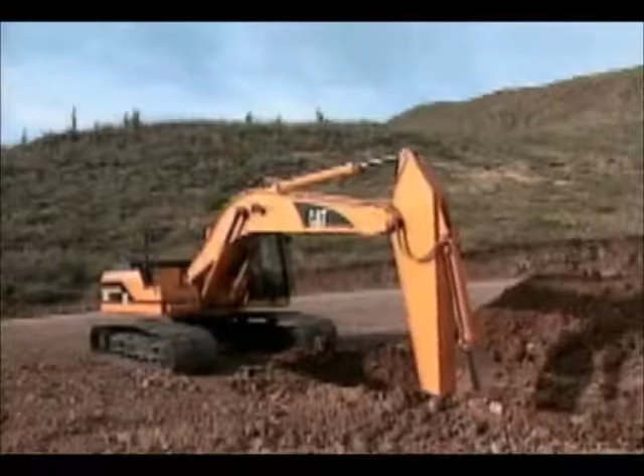This is just a small segment of the hundreds of feet of hydraulic hose on this excavator. In addition to carrying hydraulic fluid, this hose is also storing and carrying contaminants.

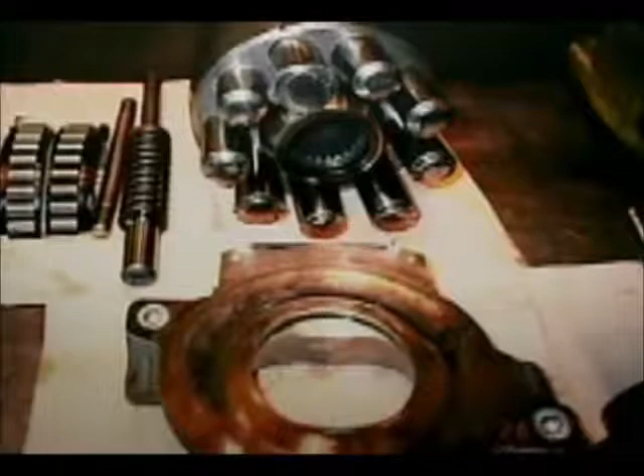This is a piston pump. It is no longer pumping hydraulic fluid. It failed because of too much contamination. This excavator now sits idle and unproductive since an excessive level of contaminants entered the system and went unaddressed.

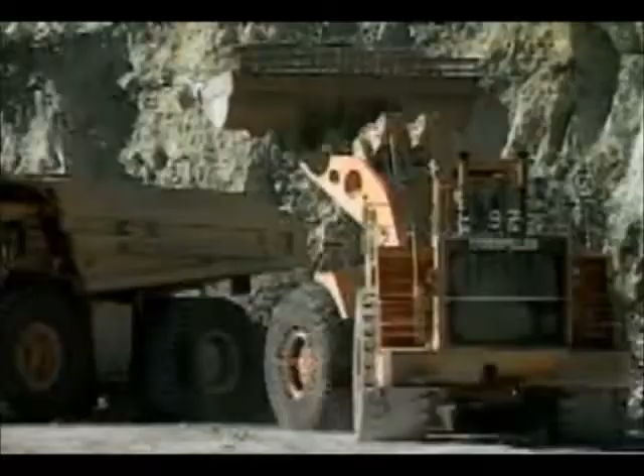Even before a breakdown, contaminants in fluid can reduce system efficiency. This is as true for fuel and engine oil as it is for hydraulic oil. A less efficient system is a less productive system.

These productivity losses can go undetected because efficiency loss is gradual. In hydraulic systems, for example, efficiency can drop as much as 20% before the operator detects a change in operation. That's losing a day of productivity each week.

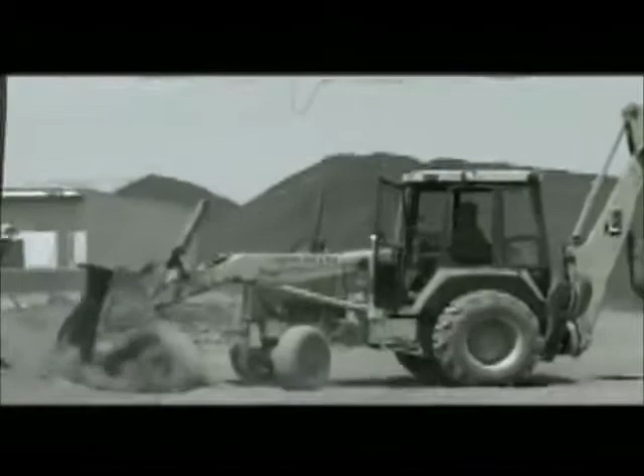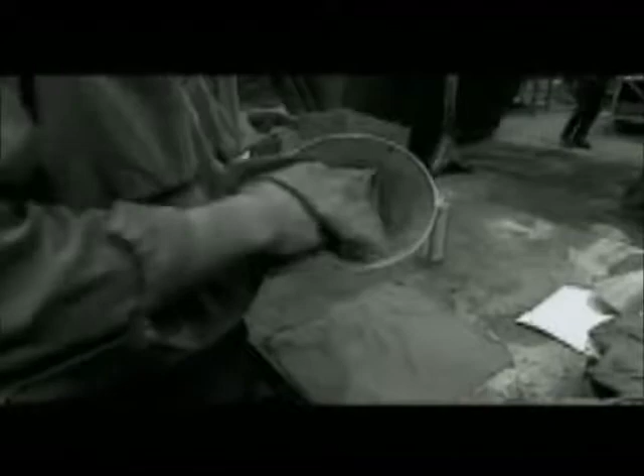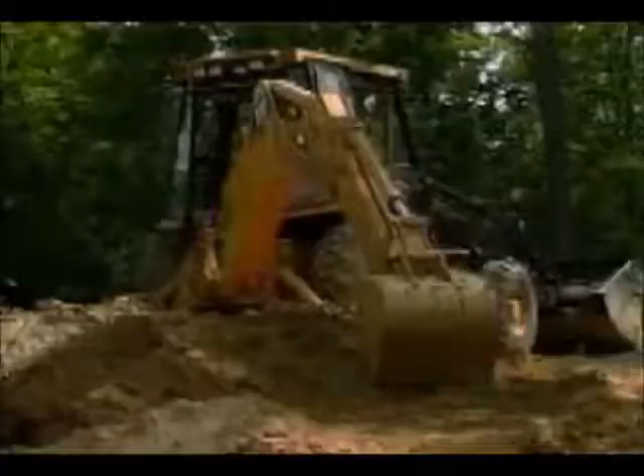There was a time when hydraulic pressures were much lower than they are today. Clearances between internal metal-to-metal surfaces were not as tight, and we were more concerned about contaminants we could see. We now need to be concerned about dirt and other contaminants that we cannot see, including particles as small as 2 to 5 microns. That small a measurement is hard to comprehend.

In order to visualize what a 5-micron particle looks like, let's start with the smallest particle that we can see, the speck of dust you see on your TV screen, which is 40 microns in diameter. You might conclude after a quick glance at the numbers that a 5-micron particle is 1/8 the size of a 40-micron speck. But to properly compare size, you must relate the cross-sections of the particles, not the diameters.

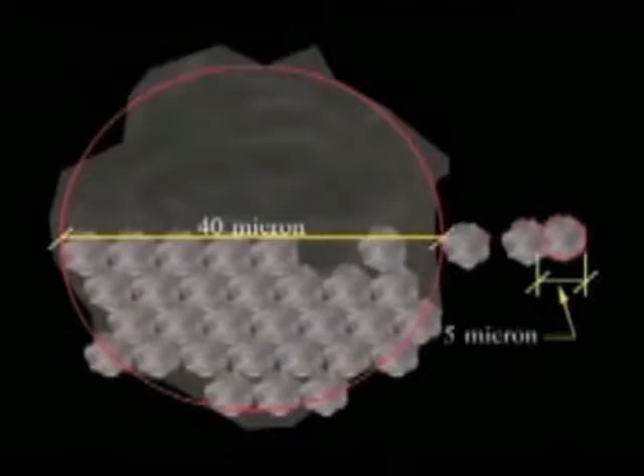As you can see in this representation, the 5-micron particle is actually 1/64th the size of the speck you see on a TV. Due to the tight clearances in today's systems, that small a particle can be the beginning of premature wear and efficiency loss. And it doesn't take too many particles to contaminate a system.

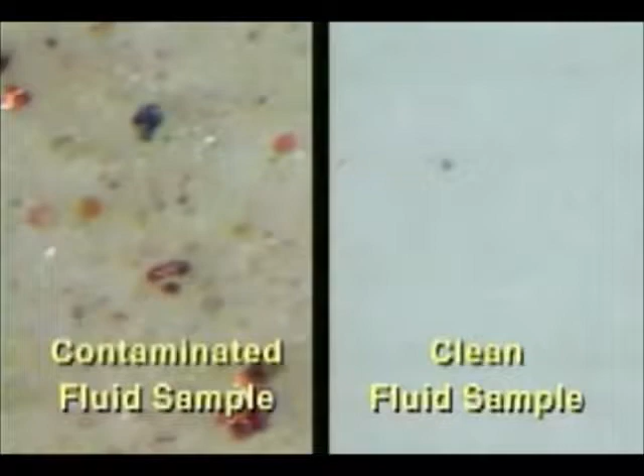Contamination particles look like this in dirty oil. A microscope reveals actual size differences in appearance between dirty oil and clean oil. But where does such contamination come from? It's often there from the very beginning.

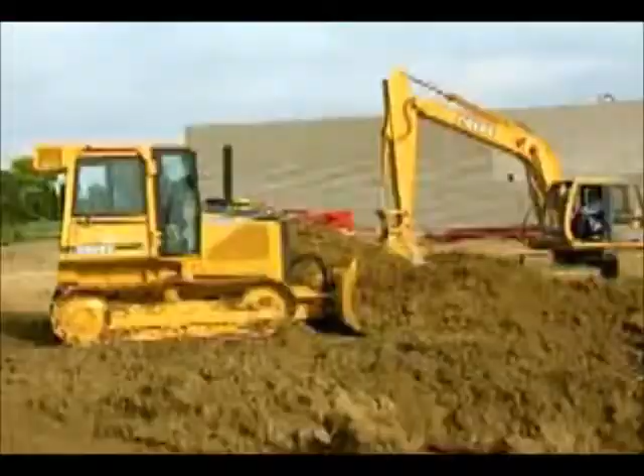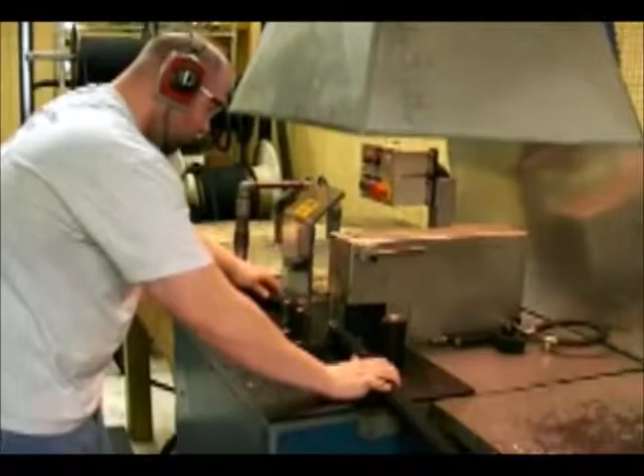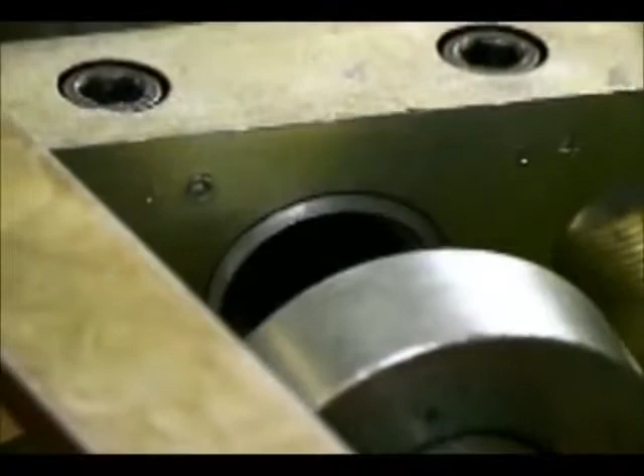Large amounts of contamination are introduced at the time of hose and tube installation on hydraulic machinery. Contamination is generated in hydraulic hose at the time of cutting and crimping. Contamination enters the metal tube assemblies during the cutting, deburring, bending, and flaring processes. Hoses and tubes that are not cleaned before installation will have a detrimental effect on any hydraulic system they are being installed on.

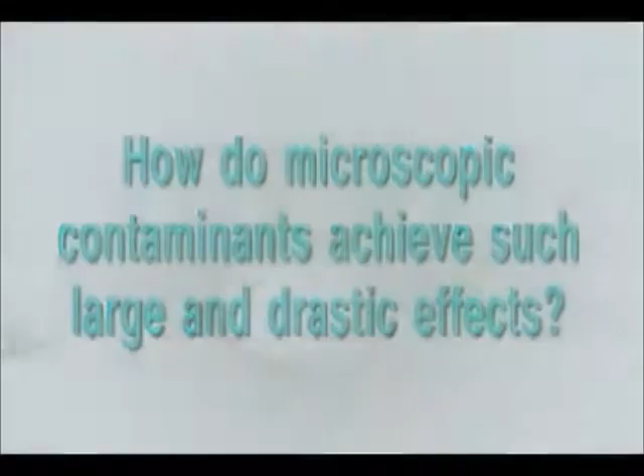How do microscopic contaminants achieve such large and drastic effects? Contaminants do not have smooth edges. They are irregular in shape and have sharp edges that cause abrasion as they scrape metal surfaces, creating additional contaminants.

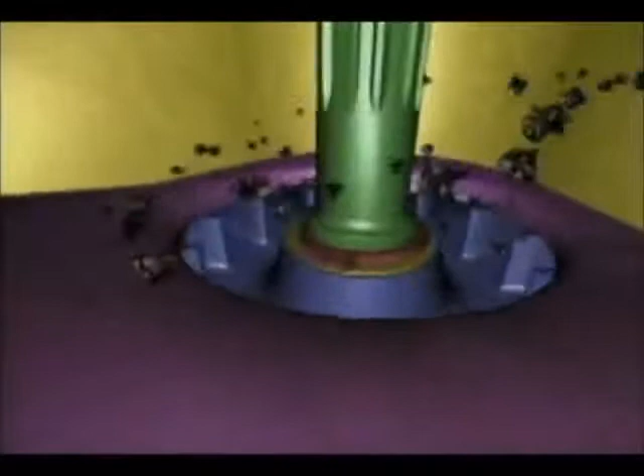Let's follow contaminants in the hydraulic oil as it is drawn from the tank, through the hose to the pump. You can see the contaminant's irregular shape with sharp edges and corners. Once the oil and contaminants are drawn into the rotating group of the pump, the contaminants can cause damage in several ways.

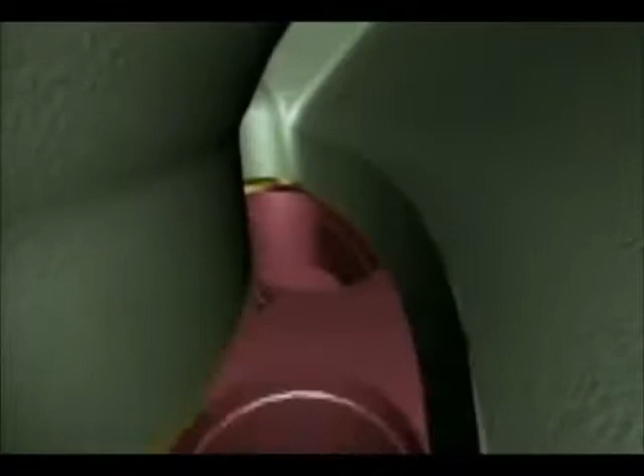The larger particles cannot pass through but will break up as they strike the stationary port plate, shown here in yellow, and cause accelerated wear. Notice how the contaminants break down the edges of the port plate.

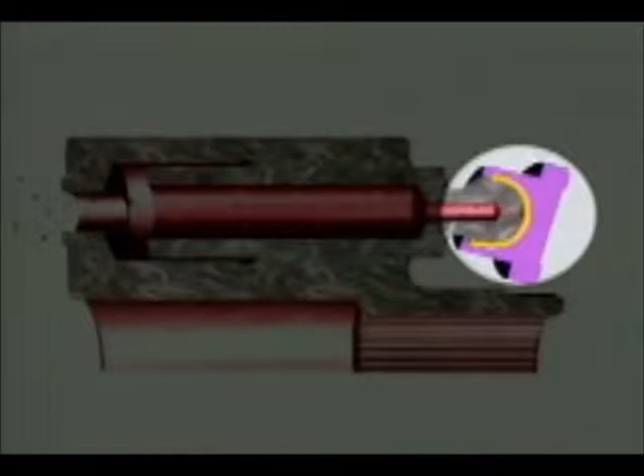As we look at other ways contamination can cause problems, we turn the animation of the pump 90 degrees onto its side. Particles can lodge between the piston and the brass slipper foot, shown here in purple, causing it to jam. The contaminants can also scrape walls between the barrel and piston.

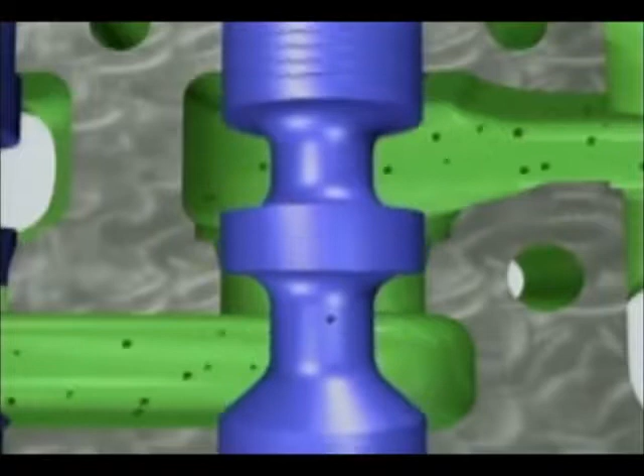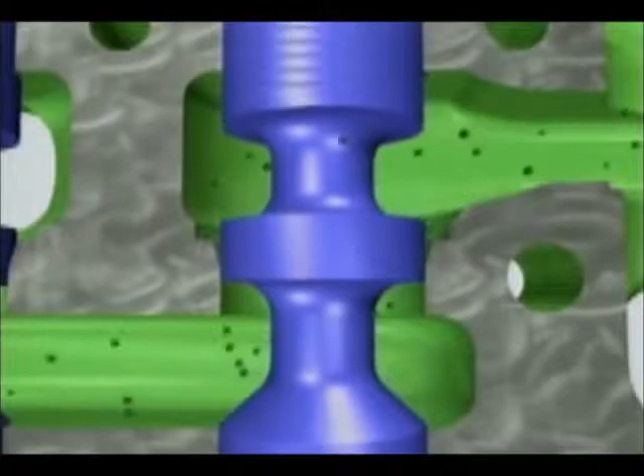Electro-hydraulic valves are more susceptible to contaminant damage because the clearances are even smaller, as small as 3 to 4 microns. Some of the particles naturally adhere to the imperfections in the wall or because of the electromagnetic conditions in the valve. This buildup, or siltation, can either slow the spool, causing sluggishness, or make the spool hesitate, causing jerkiness in the system. Over time, the contaminants can cause wear on the spool that results in leakage.

And sometimes, a large particle can become lodged and block the motion in the valve. Other particles then move on to the filter.

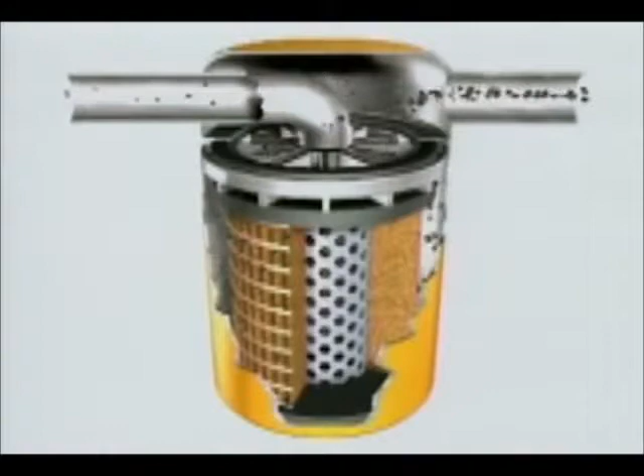Do not assume the filter removes all contaminants in a single pass. As the oil moves through the filter media, many of the particles are trapped, but a few, some large and some small, travel through the media and return to the system through the center tube. Even high-efficiency filters do not remove all contaminants.

Contamination can affect any machine with hydraulic capabilities. A hoe that swings too far on a backhoe loader, or one track that runs faster than the other, can be a sign of contamination.

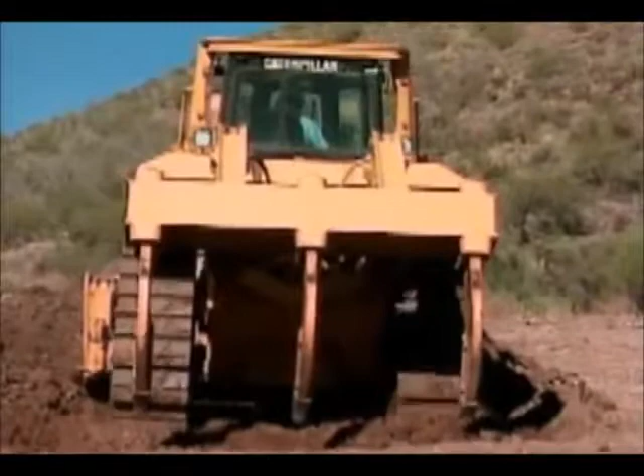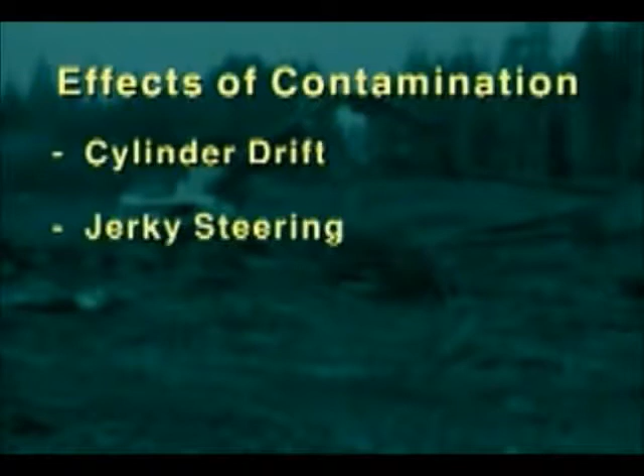Equipment owners and operators also see other common effects of hydraulic system contamination, including cylinder drift, jerky steering, slower performance, erratic operation, shorter service intervals, higher operating costs, lower productivity, and possible catastrophic failure.

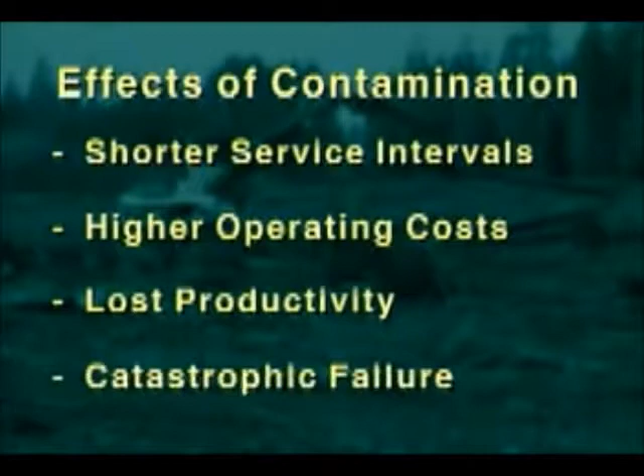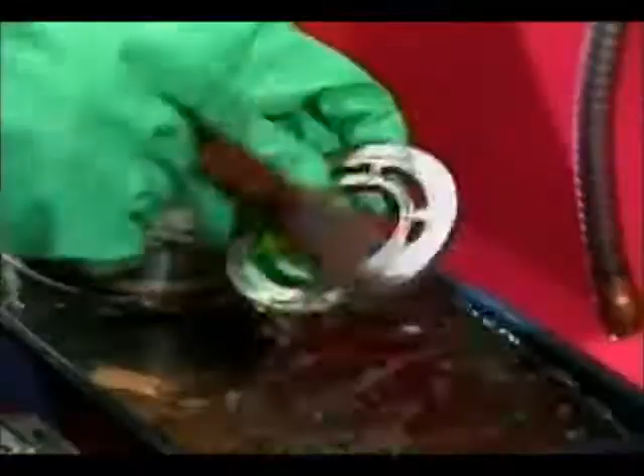The pump is one of the most expensive components to fix on a hydraulic system, and in the event of a catastrophic failure, it may take days or even weeks to repair a contaminated hydraulic system. That's why it's so important that the means exist today to prevent such problems from occurring. The products and procedures of ultra-clean technologies can protect you from such nightmares.